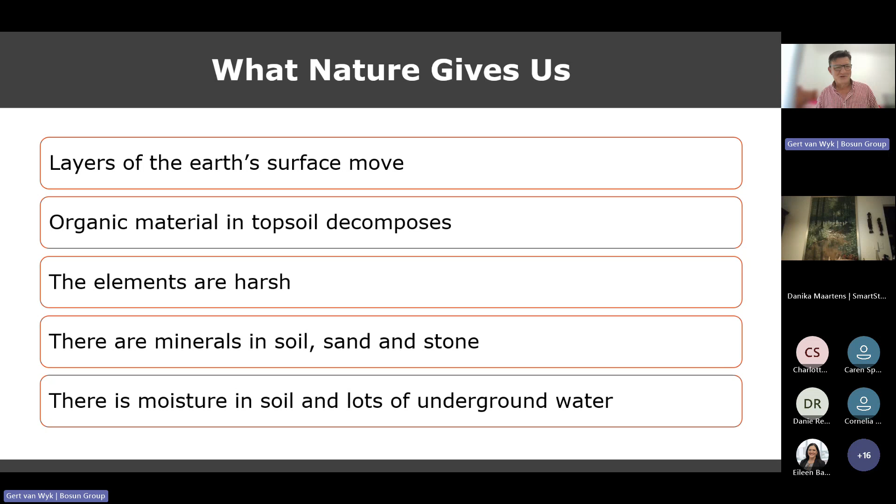Now, what we talked about last time are basically these 6 points, and we delved into a little bit more detail on all 6 of them. So just to refresh our memories, the first point, pavers - and I'm not using technical language, I'm just keeping it as simple as possible.

We don't want pavers to move up or down, especially down. If you're going to have traffic, pavers are going to sink in, pavers are going to settle. We don't want that, because as soon as pavers settle in an area, you're going to have a little dam, and that's going to attract water, or water's going to sit there.

So how do we achieve that? Number 1, we have to remove the soft topsoil, the topsoil that contains organic material. We need to replace it with an inorganic material. We need to compact it, and that serves as the foundation of your paving. If we don't do that, chances are pavers are going to settle, and that's what we don't want.

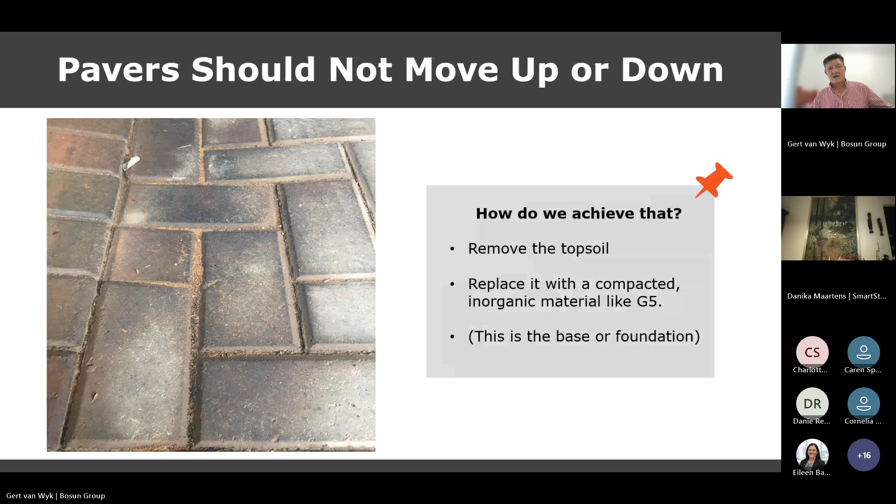The second aspect, pavers should not move sideways. So first one, don't want pavers to sink in. We also don't want pavers to open up. As soon as pavers open up, there's gaps. What's going to happen? Water's going to infiltrate. All kinds of other things that's going to lead to all kinds of other things.

So how do we prevent pavers from moving or creeping sideways? We've got solid edge restraints to keep everything together.

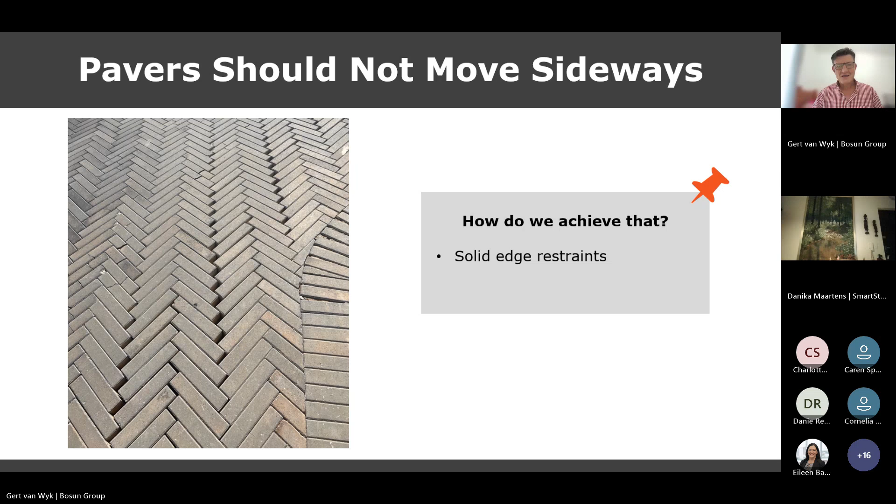The next thing we need to consider is, where's water going to go? There's 2 aspects to that. We're thinking of water on the surface of the paving, but also we know that there's some water that's going to infiltrate the system, and we need to deal with that. Something important is your bedding material needs to allow for this casual water that might infiltrate the system.

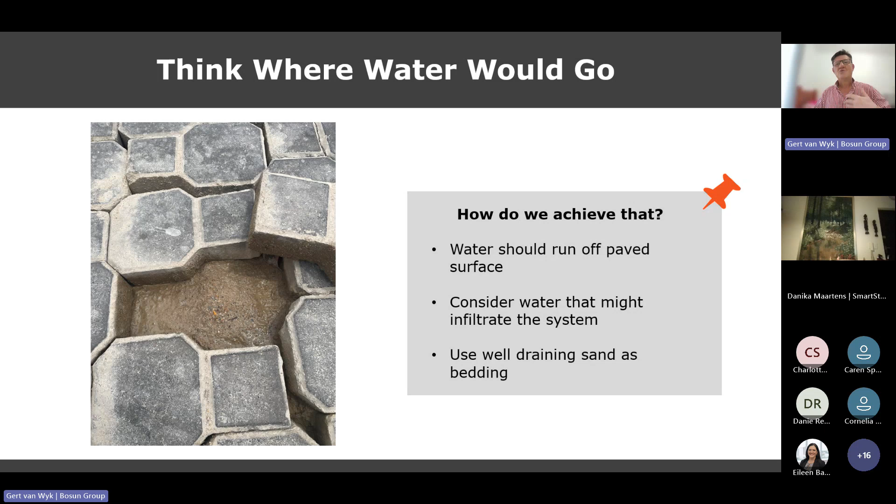And you'll see today that this is really, water and paving, they're not friends. We need to always think water. We need to think, where's the water going to go? And you'll see later on why I keep on emphasizing this point.

So this one is straightforward. That's why we pave in the first instance. We want a smooth and even surface. How do you achieve that? Plate compacting and screeding - simple contracting 101.

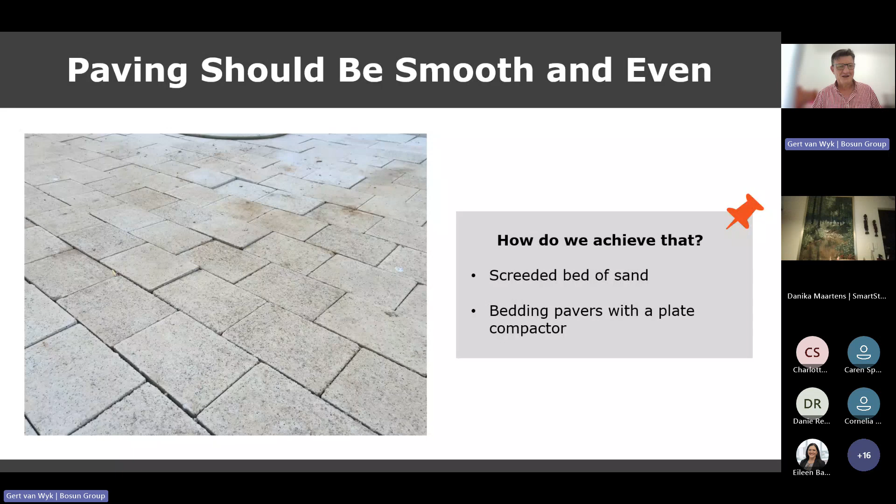This is really important in the bigger scheme of things, and you'll see again, this is one of the points that we're going to refer to on our later slides. Pavers should be locked in. Pavers, it's like a team sport, or it's a team. There's different components. You've got pavers packed in a specific pattern. They interlinked or interlocked with sand between them.

It's a dynamic system. It moves. They work together. If you move them apart, you break the system. That's really, really important. We have to try and keep this whole thing together, interlocked and locked in.

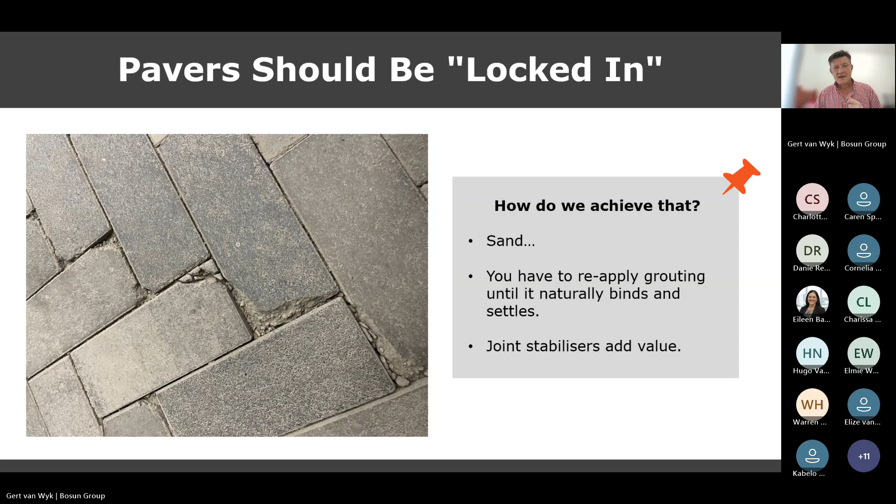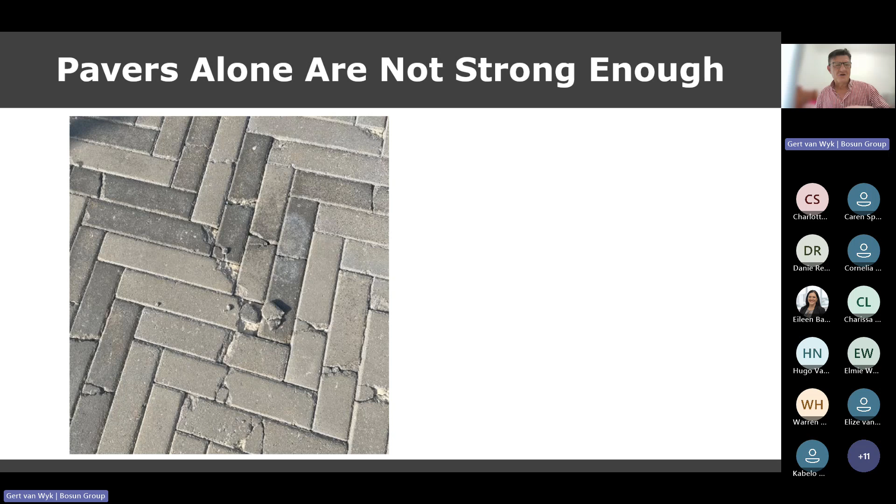Because pavers alone are simply not strong enough. I've seen it time and time again. If you leave it up to the pavers only, they can't withstand the traffic. It's not going to last. Here we've got an example of pavers with no grouting between them, and you can see the consequence.

Right, so one of the questions that came from the last presentation was - let's just stop there. Any questions, any comments? It's just a revision of what we've done last time. I don't see any hands or any comments, Kat.

Perfect. Right. One of the questions after last time was, how do I specify? How do I know which pavers to specify where and when? So it's quite a wide question, and you could have various answers to it. So I decided to keep it really, really simple.

The first and probably most important consideration is always, is there going to be vehicular traffic? Are we going to have vehicles driving on this paving? And then there's two options.

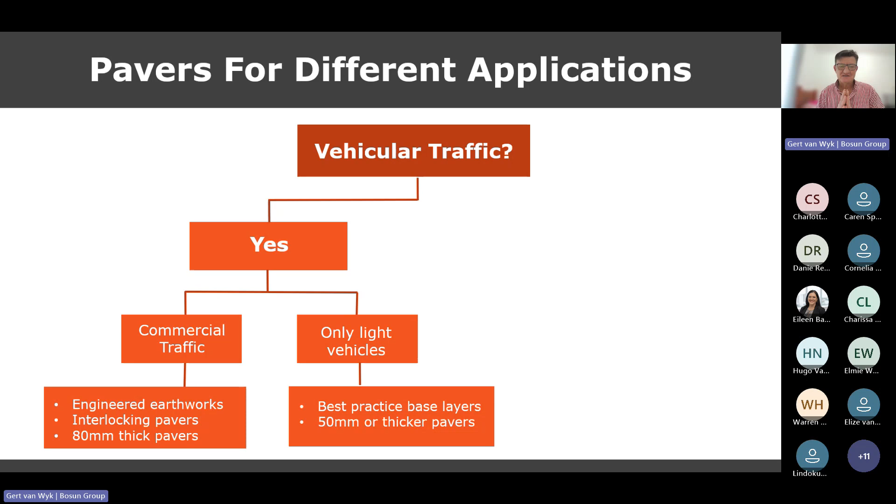That's going to be okay for an application where you've got light vehicles only. If you don't have vehicular traffic, there's two options, and that's something for us to think about because sometimes we forget it. The first one is, could it be trafficked? I think that's where the developer would say, no, this pavement is only for pedestrian traffic. But if there's a chance a vehicle could end up on this paving, it will happen.

So whether it's a delivery of chairs for an event, or a car showroom parking 6 or 7 cars at a shopping center entrance, whatever it is, it is going to happen. So it's a consideration for a specifier to consider all the options. Even though you might specify it for a pedestrian application only, there might be vehicles ending up on it, there might be cherry pickers, cleaning equipment, etc.

And then there's the last option: it is absolutely impossible to traffic. It's impossible for a car to get to where the paving is. There's steps, or bollards, or whatever the case might be. So this is what we've got to work with. This is a simple, basic decision tree that we need to deal with.

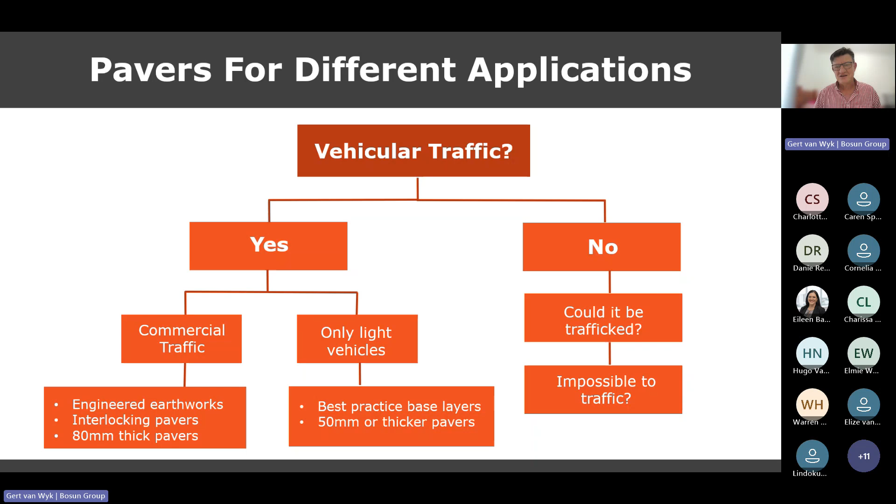Now let's just consider commercial vehicular traffic. I'm going to give you a few basic pointers. It's not from me - this is generally what engineers think about when they talk to us about commercial traffic. So let's take a shopping center or an office park.

If you've got hundreds of passenger vehicles driving over the paving every day, you've got trucks, an occasional bus, delivery vehicles coming and going, chances are that pavement endures more traffic than a municipal road, and sometimes a provincial road. We won't even, in our wildest dreams, consider building a municipal road without an engineer involved. So developers must really understand that if you've got commercial traffic, it's worthwhile getting an engineer involved - a pavement engineer, somebody experienced in the design of pavements - because it's really key that you get your earthworks under the paving right. If your earthworks fail, everything's going to fail.

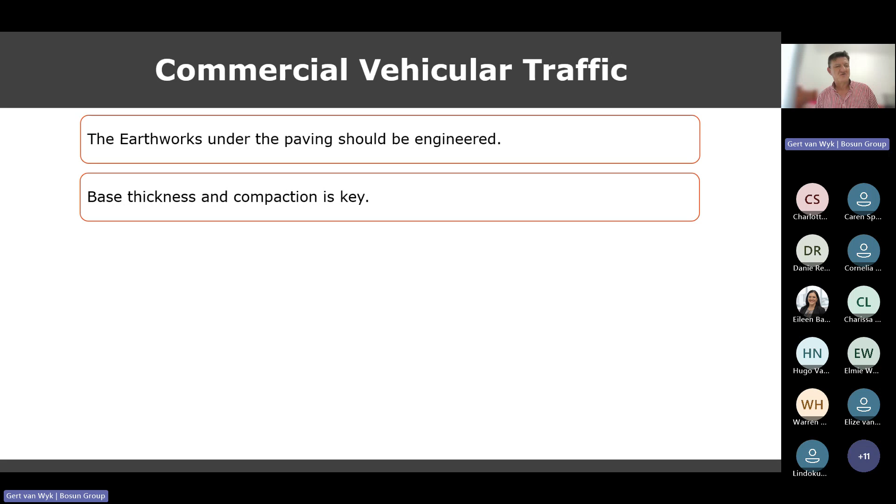Next thing an engineer could help with really, really a lot is compaction. The base needs to be compacted to a specific level or a specific number, and it's really good to have expertise in that regard.

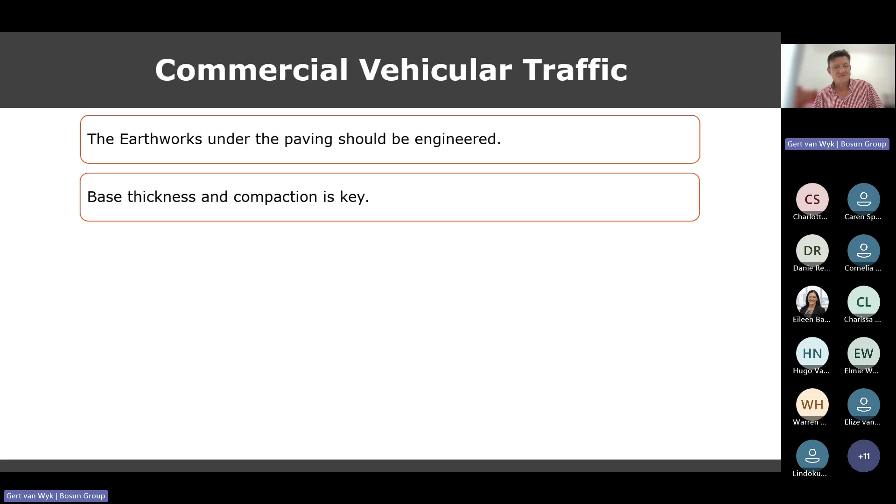When there's trucks, 80mm pavers are generally a given. And just for interest sake, it's not only that the pavers are stronger - this is something many, even engineers, don't consider. If you've got an 80mm thick paver, it's a thicker paver, so you've got a larger surface area in contact with a larger surface area next to it. There's more sand in the joint between the two pavers, so it creates much, much better interlock between the pavers. That's something really, really important.

Overseas, that's probably a more important consideration than the strength itself. It's all about the interlock. So a thicker paver gives you better interlock between the pavers.

If we think back to what we said in the basics, it's this system working together - you don't want to break it. These pavers are dynamic, they're working as a unit. So the better interlock you can have between them, the better your performance, your long-term performance. It's just something to keep in mind, sometimes we forget about it. We think, it's only 20 mils, how much stronger can it be? But it's not about the strength alone, it's about the interlock.

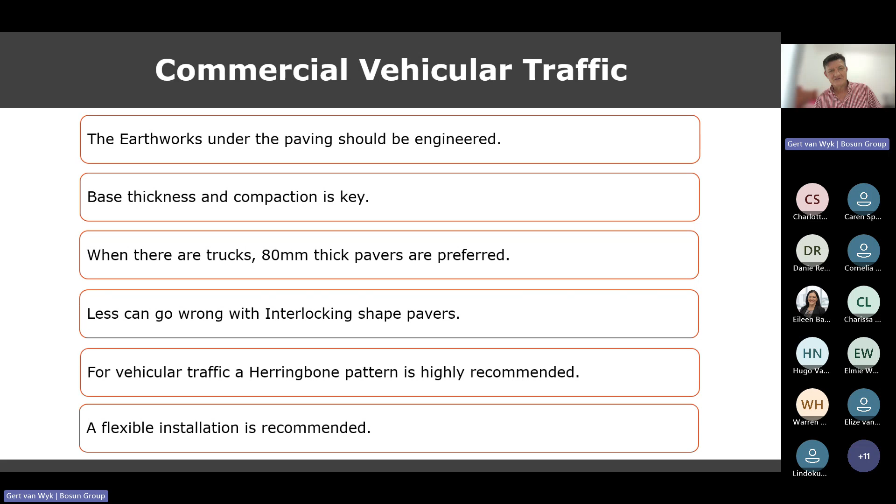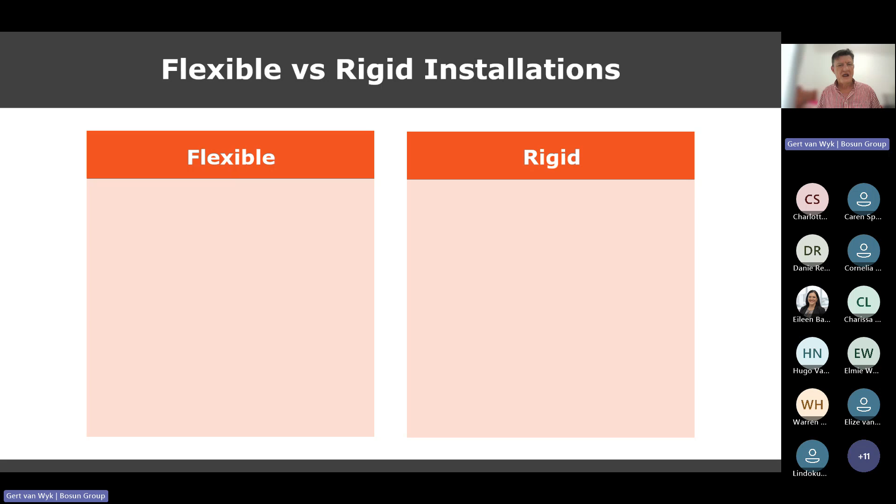And then a flexible installation is recommended, which brings us to the next question that came from the previous webinar. Firstly, what is flexible versus rigid paving installations? That's the first question - what's the difference? The second question is, okay, that's all cool, but where would we then use a rigid installation? So let's delve into that.

Flexible is where you install pavers on sand and interlock them with sand as well. Rigid is where your pavers are bedded in mortar instead of sand. So what is mortar? Mortar is a mix of sand, cement, and water. And then the grouting is a rigid grouting - it is not flexible, it is not sand.

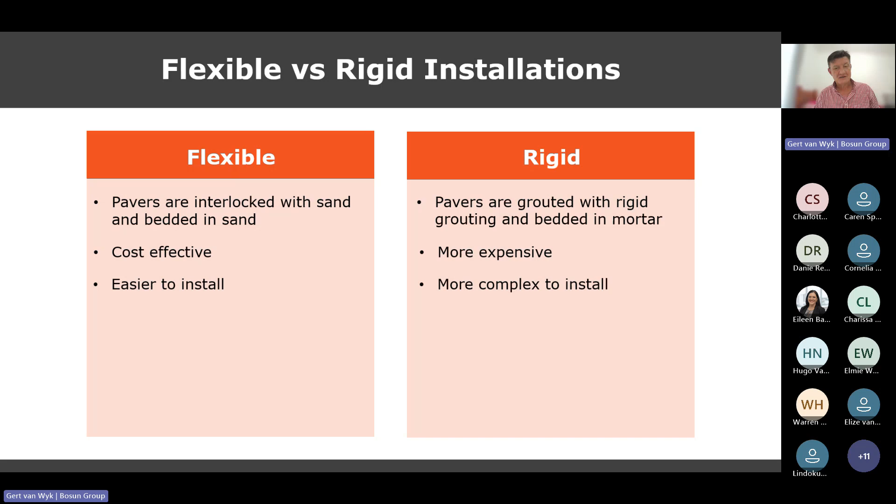So obviously, flexible is much more cost effective. Obviously, flexible is easier installation. Something to consider with a flexible installation, you've got access to underground utilities. With rigid, it's much more difficult because remember, now your paver is bedded in mortar. You've got a rigid grout between the pavers. So it's going to be more difficult to get to whatever goes wrong underneath the pavers.

Another big consideration, flexible pavers can be trafficked immediately, where with rigid, you have to wait for the mortar to cure. So just a practical consideration. And generally speaking, flexible works better for small jointing gaps, where with rigid jointing, your gaps between the pavers must be a little bit bigger than tightly packed pavers.

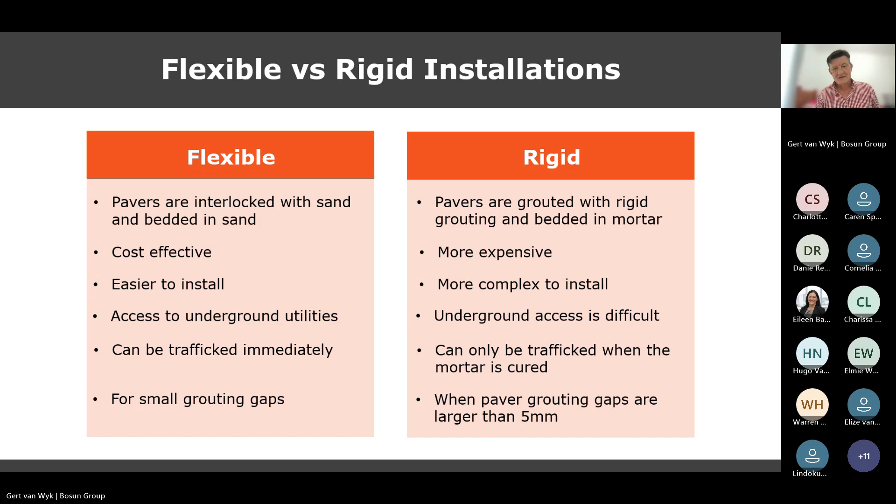So then the next question, when do we consider a rigid installation? So shall I ask the question, where would it be useful to possibly consider a rigid paving installation? Any ideas? Anybody want to raise their hand or pop it in the chat? I see Donnie's hand is up.

Yep. That is actually interesting. We haven't actually used rigid installations, save for sometimes for clay pavers. But all our concrete pavers up to now, we've just used a normal sand grout. But I guess if you use some of your products that are more like a tile, I guess you can do rigid installation. But our experience on that is that cement grouting normally cracks and pops out. So I don't know if it answers the question, but yeah, I don't specify rigid installations often.

Agreed, Donnie. It's really only for emergencies, especially in commercial applications, because it's more expensive in the first instance. But there's a few areas where you would do it. So the first area is if you're dealing with large pavers. Generally speaking, for vehicular traffic, you won't specify large pavers. But let's just take a step back. Where it's useful to do a rigid installation is if you use large pavers for a residential driveway.

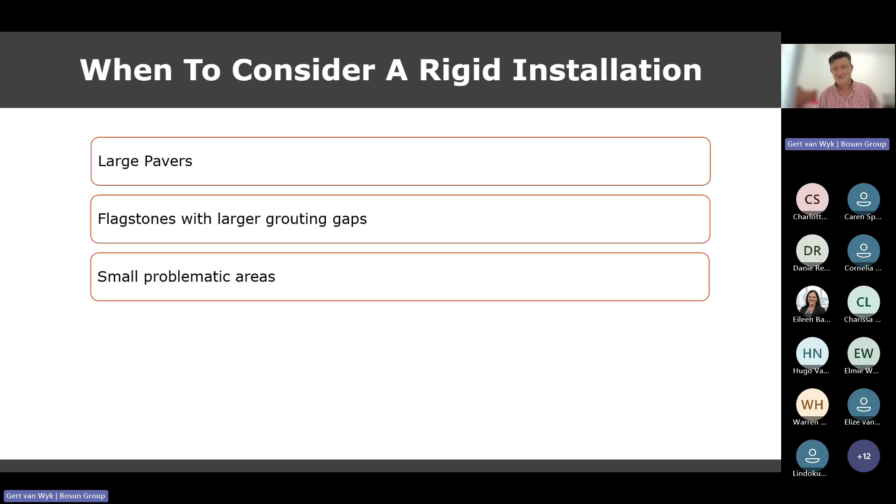But that's a small area. So it is an option. If a piece of paving keeps on failing, sometimes it's just better to say, in simple language, let's just glue these things down. Let's eliminate any chance of movement, and that will give us a solution to the problem that we've got.

Another place where we could possibly consider a rigid installation is when we foresee drainage could be a problem. Then a solution could be, let's try and just keep water out of it. Let's try and waterproof the surface of this paving. Let's stick down the pavers. Let's waterproof the whole thing. Let's try and eliminate a sniff of water going into the system. So that's an option in specific applications where you foresee drainage or water being a problem. And then obviously you have to think about underground access, and that's one of the biggest drawbacks of a rigid installation system, apart from it being much more expensive.

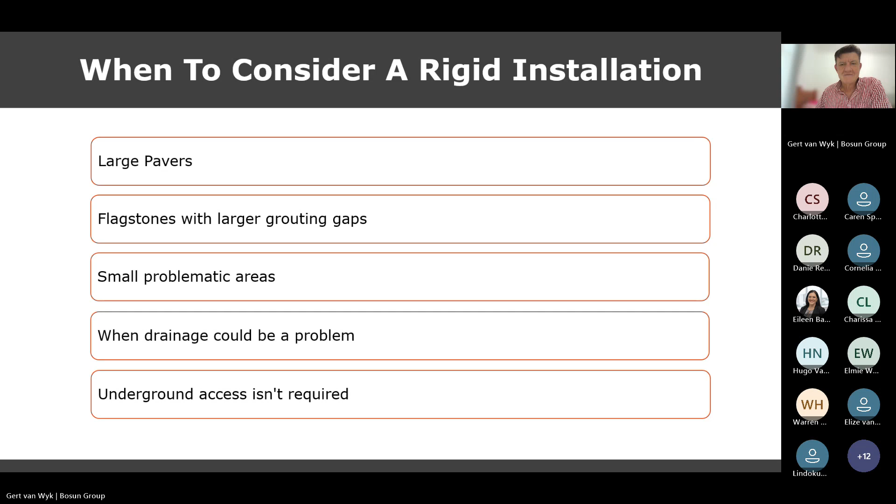So does that answer the question of rigid versus flexible installation, and where you use, like I say, really emergencies only for rigid installation? Any comments, any questions around that?

Right, so let's get into the meat of today. So, problem areas: we as manufacturer and you as landscape architect definitely ran into trouble at some point of our careers in the following scenarios. So there's a few, call it, nature-given circumstances and built circumstances. It's just more difficult to install or to specify paving in these circumstances or in these environments.

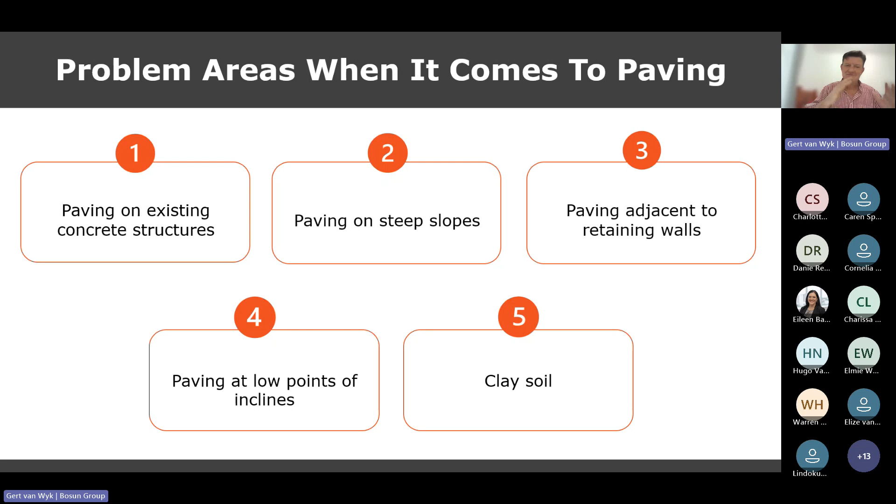So we're going to go through them in a bit of detail, but what I want to try and do is link it back to the basics, because like I said, everything boils back to the basics. And even with permeable paving, you'll see in May when we do the thing with Dave, still the basics apply. Even though it's permeable paving, even though it's installed differently, these basics are still key.

So the first problematic area is paving on existing concrete structures. So what is an existing concrete structure? Any ideas? What kind of applications could it be? What's the most relevant place that you can think of?

Kabelo? Was that a mistake hand? Or you muted? Kabelo, did you want to say something? Okay, seemingly not.

Okay, so a practical application where this could happen is when there's an underground parking garage. It's one of the first questions to answer when you're specifying or installing paving: is there anything underneath? Is there a concrete structure? Are we working on top of a concrete structure? Because these are real world examples. This is what happens if you don't consider that you're installing paving on a concrete structure. It can be absolutely disastrous. I'm not saying there's not solutions for it. That's what we're going to talk about today.

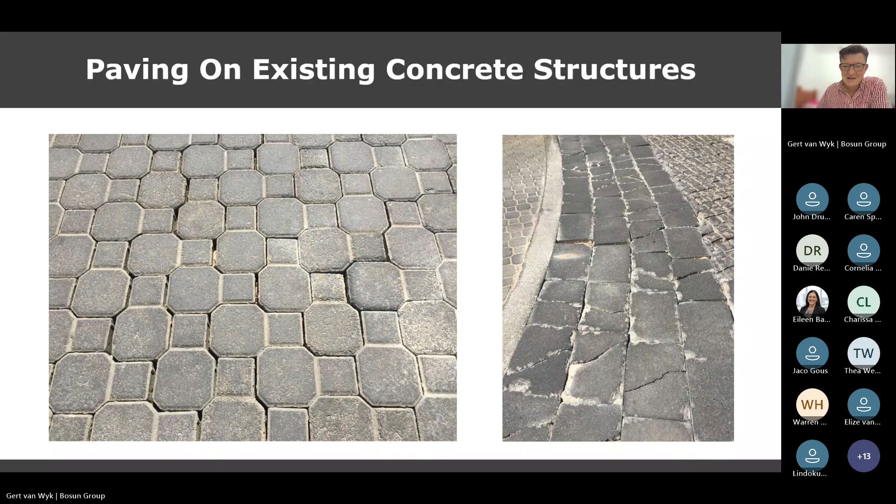Like I say, what they do overseas generally is they use other materials. They use metal, and it's not necessarily just concrete, because concrete also brings a little bit of complications when you try and contain your pavers on a slab. So it is a complex thing, but it's not something that can't be overcome. But yeah, it is difficult, and like you say, it is common. And the problem is, once it starts happening, there's almost nothing you can do.

Something else that you could potentially also do to prevent problems is use a joint stabilizer. Now, joint stabilizers in South Africa, most of them are imported, or the good ones in any case are imported. It's a urethane-based product, so it just seals off the joint. Number one, it binds the jointing sand to each other. It binds it to the paver, and it waterproofs the paver. So it is a way, number one, to keep water out, and number two, to keep your sand intact.

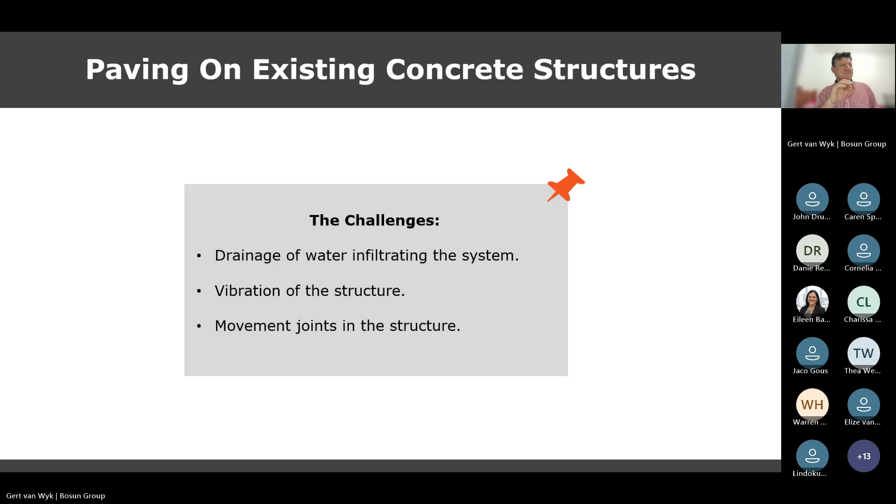And that is a practical, call it a shortcut or a hack. I don't want to say prevent, because there's so many other things that could be problematic, but that is an option. And we have salvaged paving on concrete structures specifically with just a joint stabilizer. I can think of Boogertman Pretoria's old offices in Brooklyn as one example where the joint stabilizer sorted out the problem.

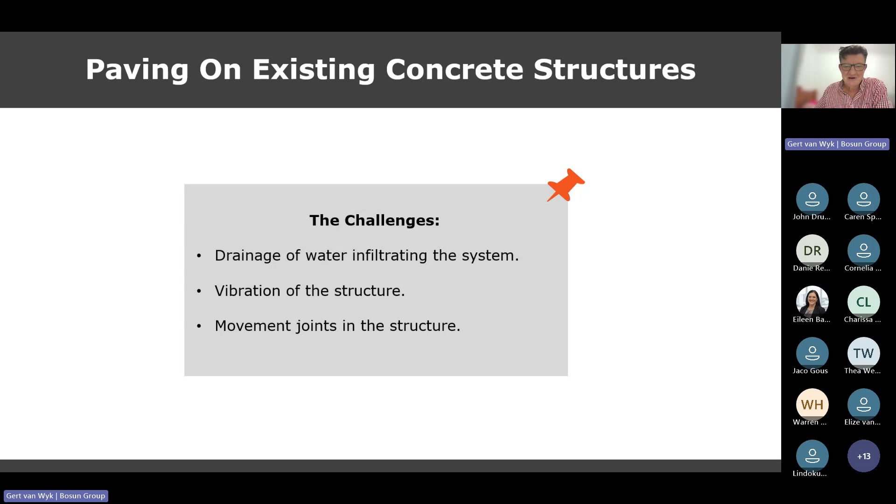If we now think back, what are the major problems when it comes to the basics of paving? Number one, water. We have to think water. And number two, this concept of interlock, of keeping the paved system together so that everything's connected and there aren't gaps. Now, what happens with slopes, especially when there's vehicular traffic? On a slope, you've always got acceleration and braking of vehicles. That puts enormous stress on the paving. As a vehicle accelerates up the slope or brakes coming down, you can imagine that might open up little gaps if the pavers aren't packed and contained tightly together.

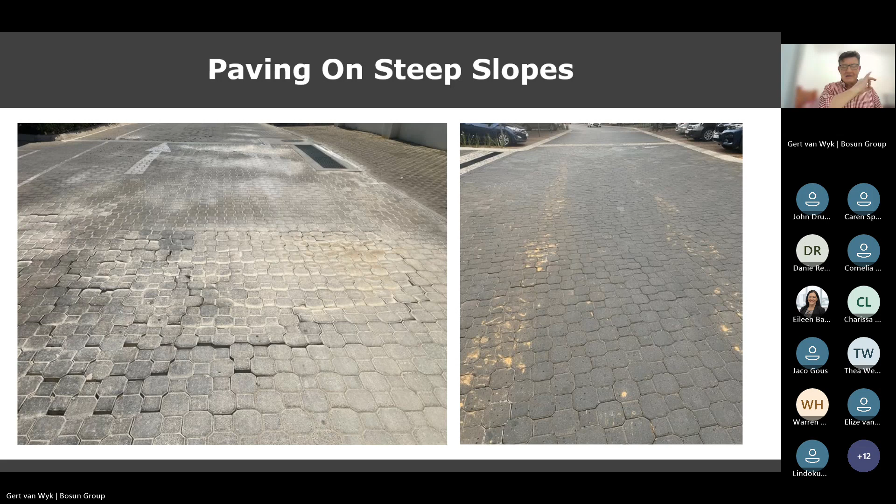So just a practical way, there must be weep holes in your edge restraints that allow water to go through. Obviously, if there's a weep hole, you have to have some form of material that will allow water to go through, a geotextile or something that allows water to go through but not the aggregate. And that will solve the problem, because then your water can go out of the system somewhere. And this is really what we found is the biggest problem when it comes to paving on steep slopes.

And we've seen many examples like these two pictures. And again, not rocket science. Any questions, any comments on this?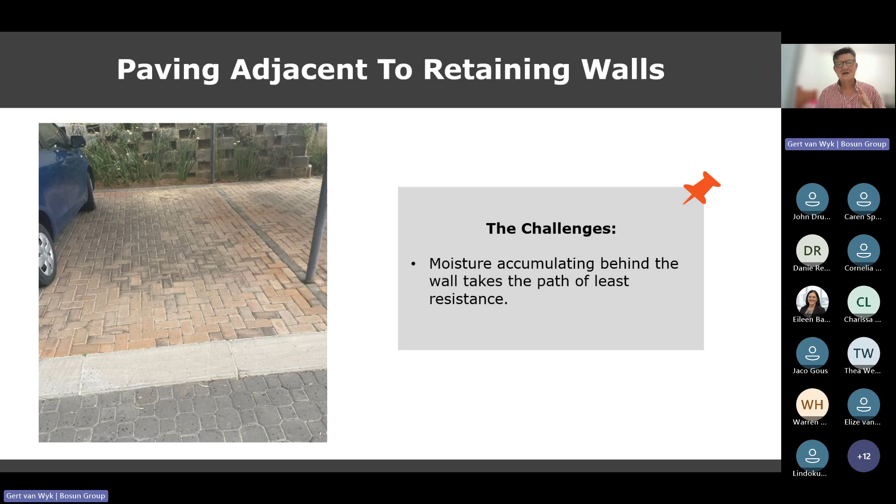So that water, when it hits, goes underneath the retaining wall. The easiest path for that water to go is in the bedding sand underneath the pavers, and that's why these pavers are so discolored. So just bear in mind, right next to retaining walls, when you're paving, there's always a chance of water ruining the party. The same with steep inclines, long inclines.

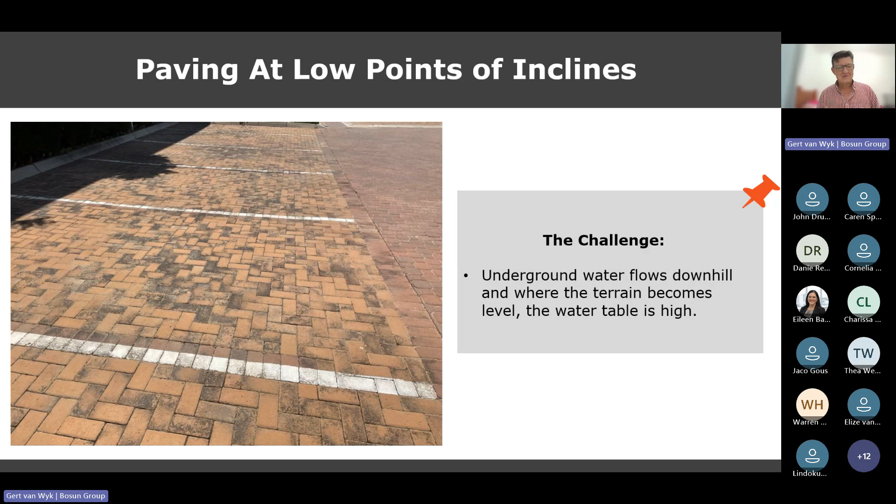When your natural land slopes down, remember what's going to happen. It's not only surface water, it's underground water. It's going to follow the contours of the land. Where the land flattens out, that water is going to start gathering, because it's all the underground water coming from the top together with the water naturally draining into the earth where the land's flat. So where you've got lots of underground water, where you've got high water tables, you've got all kinds of issues. One of them is discoloration of pavers.

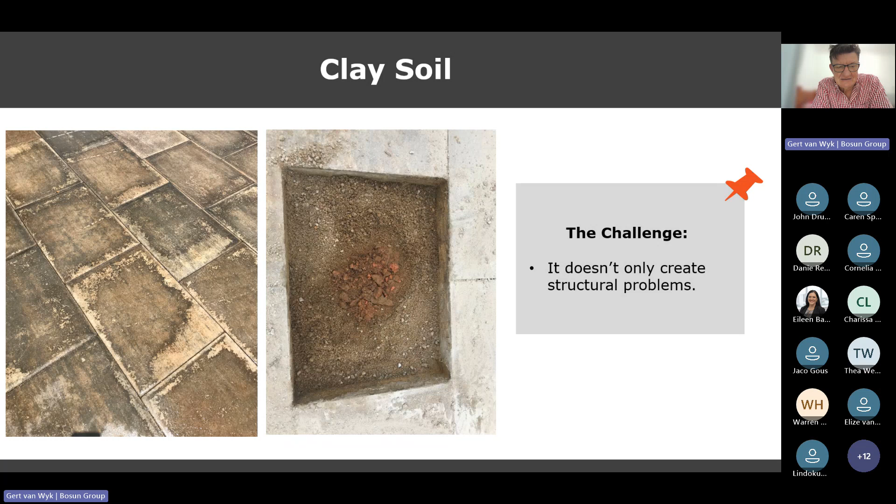Similarly clay soil. We all know that clay's got challenges when it comes to construction. It's not only the structural side of it, it is also aesthetics. Clay soil's got lots more minerals in it, and it discolors pavers. It's not good. So it is a consideration. So we're running out of time, but we've got a few practical things that I just want to quickly cover here.

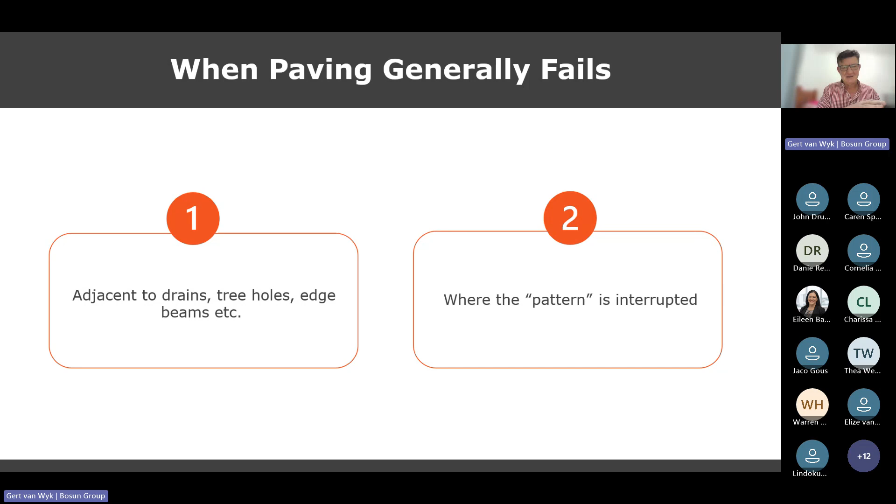So where does it generally fail? Generally speaking, the most common places where paving starts to fail is when there's funny little things, when there's drains, tree holes right next to the edge beams. That's one side of it. And the other thing, which is kind of related, is when the pattern is interrupted. These funny things interrupt the pattern, and that's where generally the simple failures occur. So I'm just going to point out two or three practical things for you to consider on site.

So number one is around these funny things, around the drains, around the edge beams, it's really, really important to think about the compaction of the base underneath. Because on the big areas, you've got mechanical equipment, you've got rollers, mechanical compactors, jumping jacks, all kinds of things that are used for compaction. But around this drain, it's difficult. You can't go in there with a machine. And you hardly see a hand tamper on site.

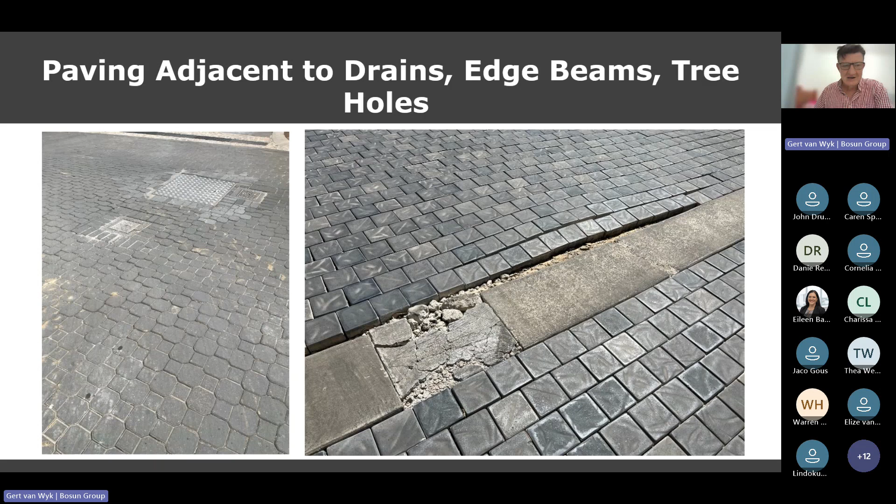And I don't want to sound... paving is so forgiving. It's really, really forgiving. It's been done since, like I said in the previous webinar, since the Roman time. So it's not that I'm saying it's a disaster or whatever. It's just a consideration. Just these small little basic things will make life easier for us as specifiers and suppliers.

Somebody asked a question specifically about tree holes. Now, the problem with tree holes is, again, we're breaking the pattern, number one. And then secondly, yes, it is, like I said, the compaction and stuff around it. Yes, it could be problematic. But with tree holes specifically, the issue is what they generally do, and this is a really, really good example. You can see that they bedded the edge of the tree hole in mortar. And the pavers are bedded in that mortar, and in theory that should create a restraint, an edge restraint.

The problem is, number one, if we look at this mortar, it's literally just a little bit of mortar on top of whatever's been there. Let's assume they installed it on G5 or something. Now you've got this little piece of mortar on top of that. That's never going to be strong enough. So you have to have enough mortar that would contain your bedding and your base. So it must be a solid chunk of concrete that contains everything.

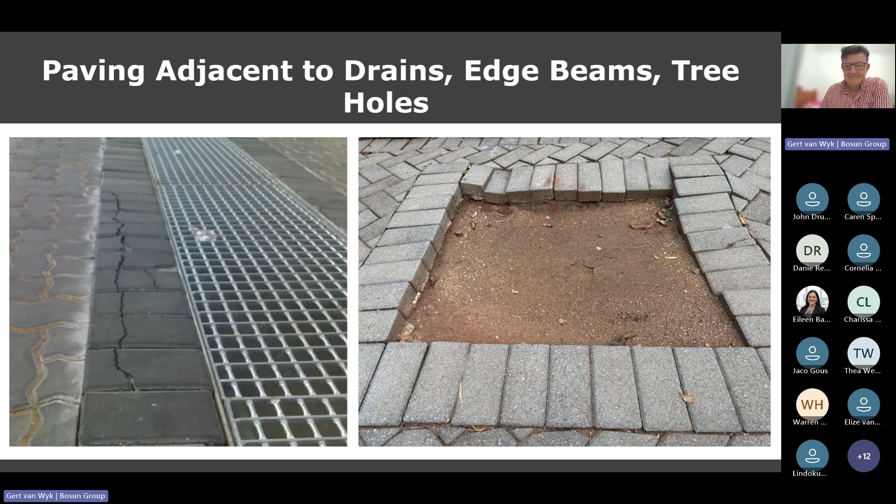So, simple answer, tree holes, if you can avoid them, I would avoid them because it just breaks the pattern. But if you want to do them, make sure that underneath the paving is a strong enough structure to keep everything together so that it doesn't migrate into the soft soil of the tree ring, or tree hole rather.

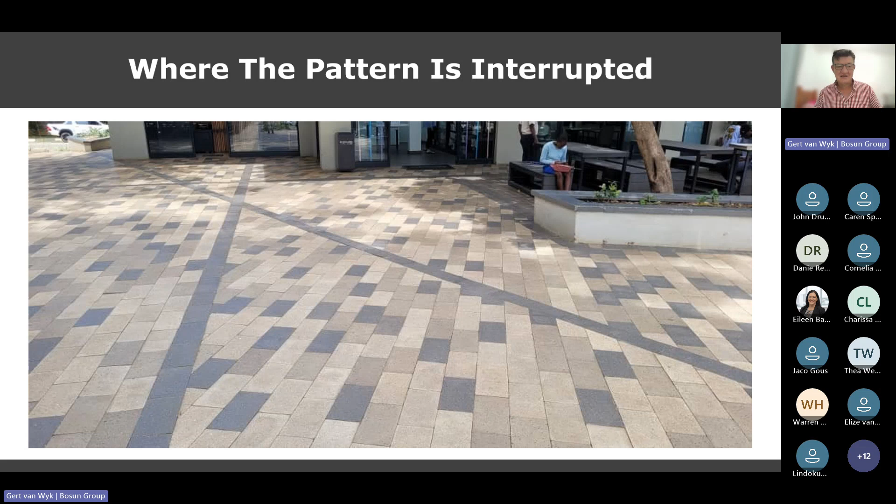Right. Any questions? I really hope this wasn't boring. I hope it added value. Gert, yeah, I think from my side, I'm good. I don't know if there's anybody else on the floor that has got specific questions for Gert. I think everybody is on mute, so speak now, or I think everybody is probably thinking about dinner already.